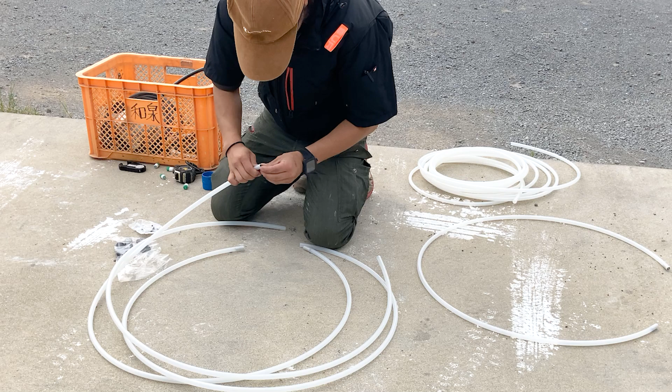PISCO for livestock industry. You can reduce setup time by updating your piping. Let's see how you can improve piping efficiency with the right fitting.

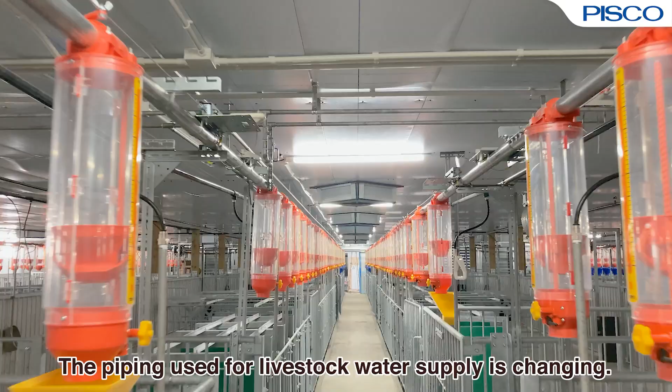The piping used for livestock water supply is changing. More and more operations are moving to push-in fitting piping systems.

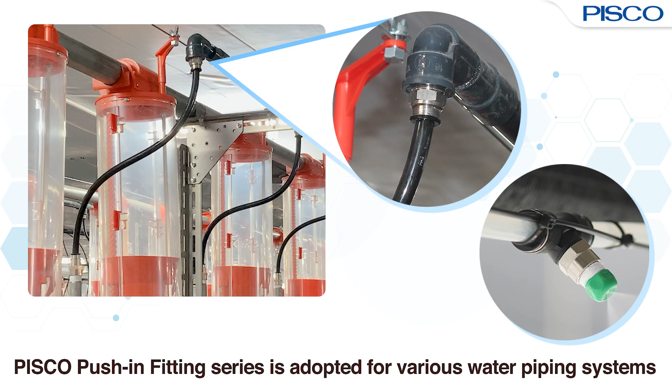PISCO's push-in fitting series is adopted for various water piping systems, including pig barns, chicken coops, and fine mist cooling. PISCO fittings are preferred for one key reason: they make piping installation easier and more efficient.

Let's take fine mist cooling installation as an example and compare the piping labor required for PVC piping versus piping with push-in fitting. First, PVC piping.

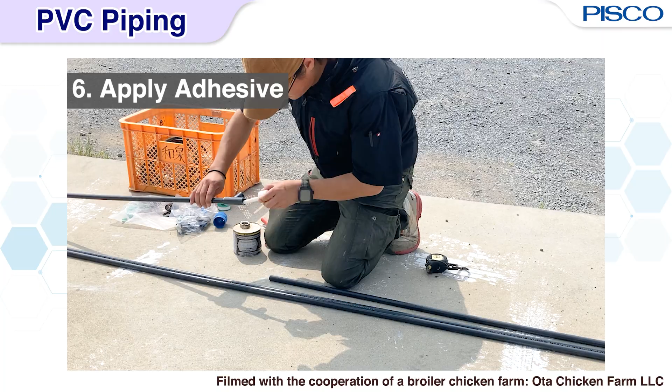With PVC piping, installing a single fitting requires 8 steps. Completing piping for 10 fittings took approximately 15 minutes.

Next, piping with push-in fitting.

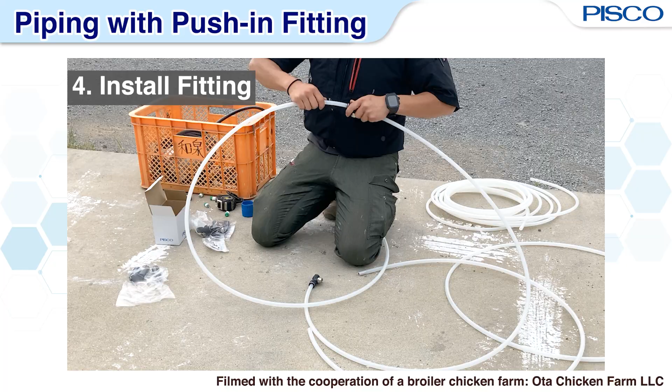Installing a single push-in fitting requires only 4 steps. Completing piping for 10 fittings took approximately 5 minutes. Compared to PVC piping, the process steps are reduced by 50%, and installation time drops to nearly 1/3.

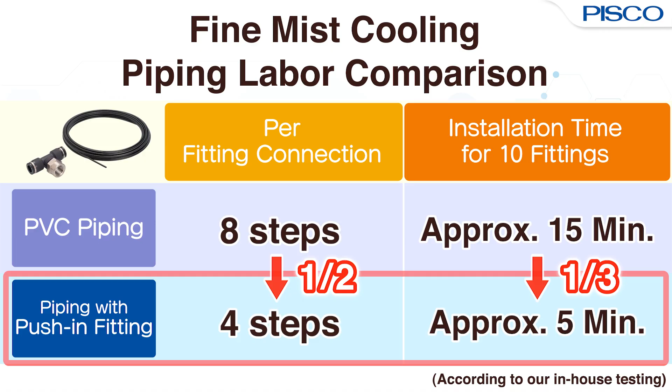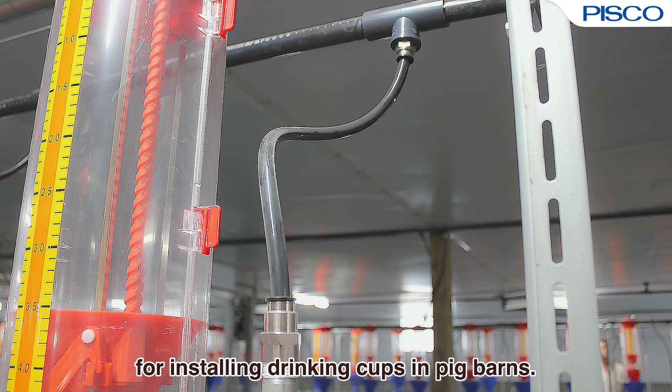On-site feedback: push-in fitting case study. Here's feedback from a livestock equipment manufacturer that adopted PISCO push-in fitting for installing drinking cups in pig barns.

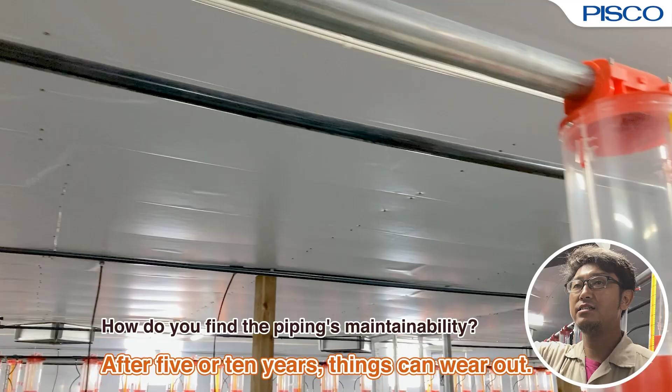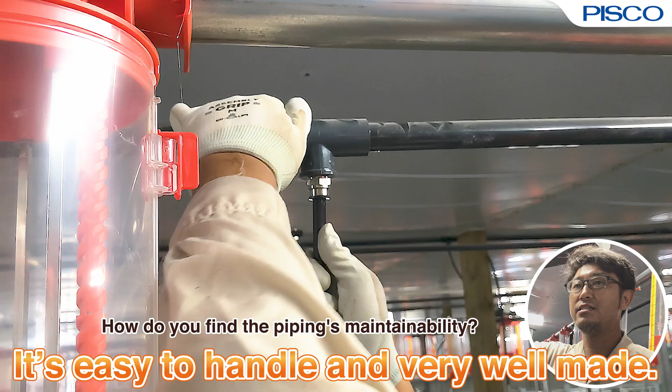First, tube installation and removal can be done easily without any tools.

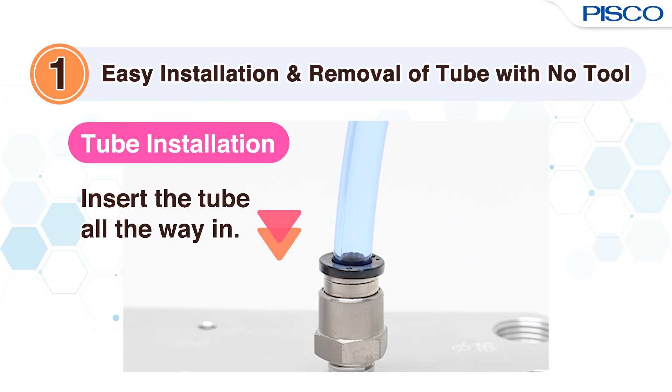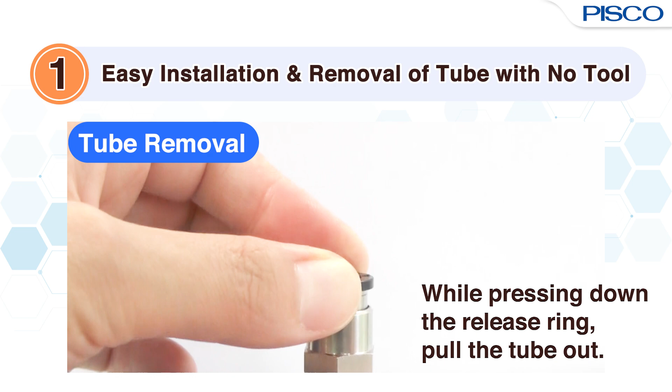Second, it is compatible with water applications. PISCO's uniquely designed sealing gasket prevents internal leaks, allowing for safe, reliable flow of water.

Third, no thread seal tape is needed. The threads are pre-applied with sealing compound, eliminating the need for additional tape.

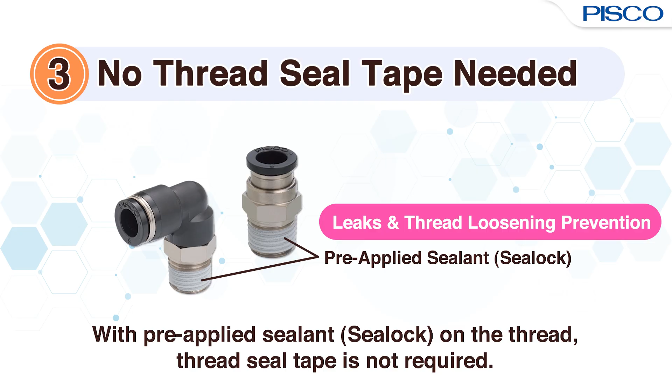Faster piping starts with easy tube handling. Experience PISCO fittings for yourself.